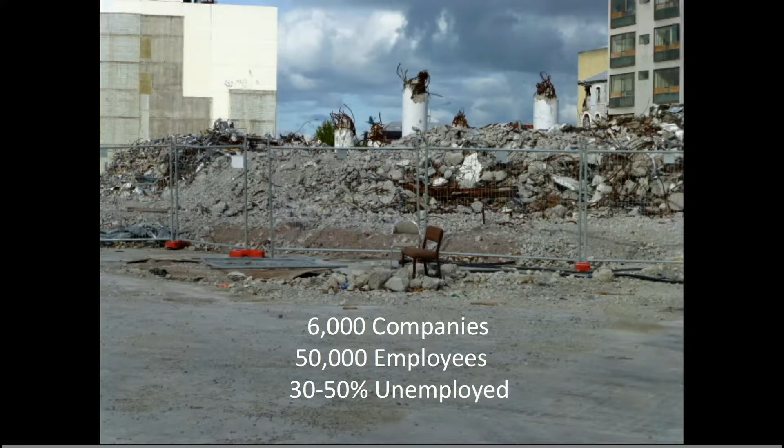About 1,800 buildings were demolished. There was essentially the loss of the entire downtown. In that downtown, there were about 6,000 companies with 50,000 jobs.

In the immediate aftermath, of course, there was a significant amount of unemployment. Now, some of that has come back by people moving to the suburbs.

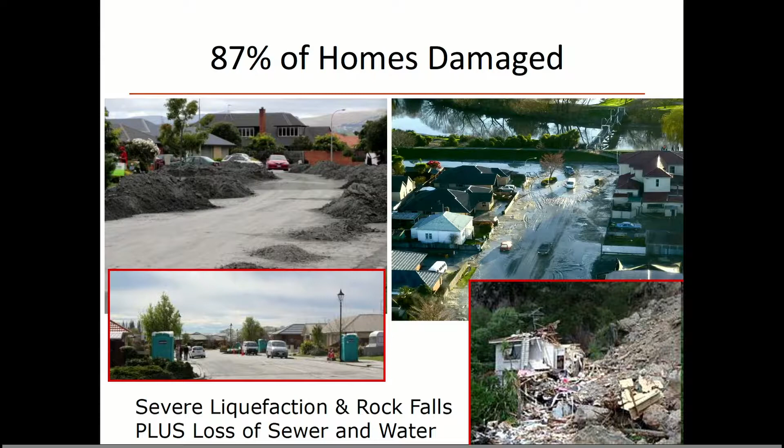But there was also a huge amount of damage in homes. 87% of the homes had some damage, about 30% of those quite significant. There was severe liquefaction throughout the residential areas, and there were rock falls and cliffs falling.

And yet the losses, by technical standards, we considered typical. It was about 50% of the value was residential, about 25% commercial, about 25% government and infrastructure.

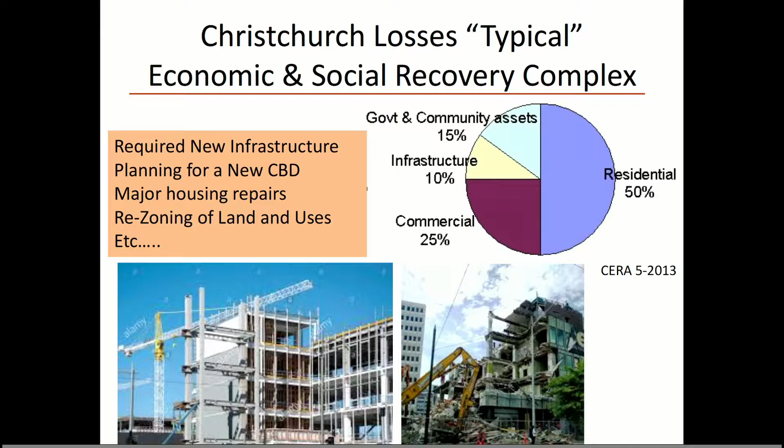But it required a huge amount of infrastructure replacement in the whole city. It required the planning of a new central business district, zoning of land use, etc. So it is a very difficult, time-consuming urban process.

Now, the social capital really made a difference. I talked about the social importance. The citizens of Christchurch were very loyal to their city. They organized in churches, art events, music events, they used vacant lots for concerts. All of these things really contributed to a sense of community and a willingness to recover.

But attitudes are really changing. Initially, there was a large plan to rebuild the downtown with a green and sustainable city. It was met with a lot of skepticism. But as businesses relocated out to the suburbs, there was traffic, but there were also floods, fires, more earthquakes, more disasters. And that began to influence people's attitudes.

There's some recent research by colleagues at the University of Canterbury in Christchurch that says the common views on building codes are really changing. People are not satisfied with just a life safety building code. They really want to see higher standards. And tenants renting in downtown buildings are expecting to have those standards.

They won't rent otherwise. So you see signs on real estate advertising the structural system of the building, advertising that this is a low damage building. There's a recognition that their experience has really increased the citizens' knowledge and made them better consumers, and has contributed a great deal to how the city is going to grow and change over time.

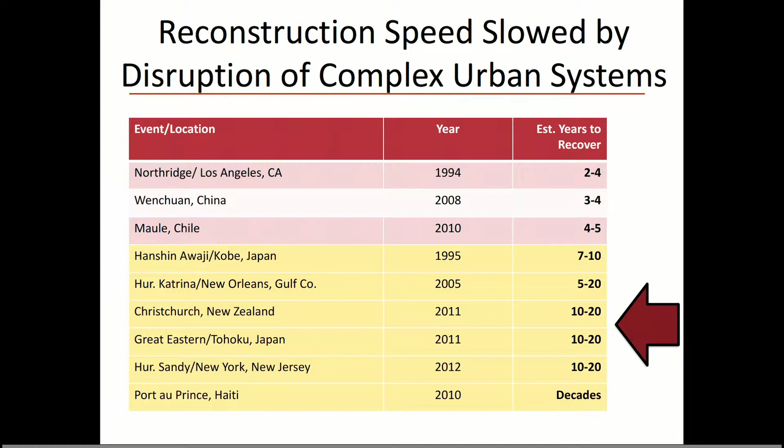This is because there are so many complex systems involved. So if you ask what was the experience in Christchurch different, yes, from those first three, but more like everyone else. So let's look at some of those cases and what lessons they can offer for resilience.

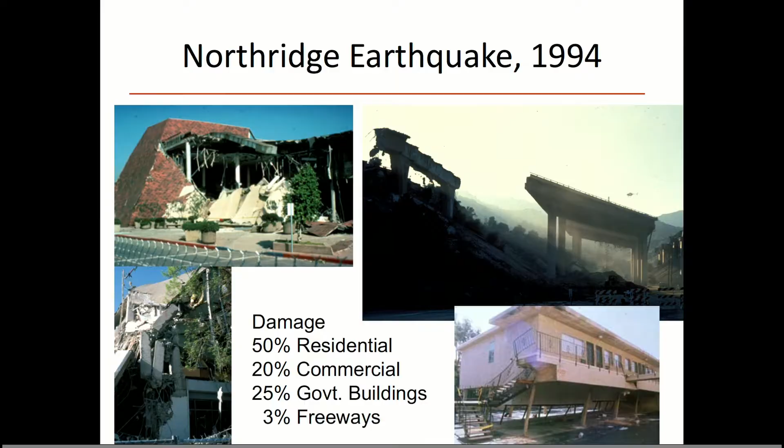First, I'll quickly discuss the first three because they're interesting cases. The Northridge earthquake in 1994 had a very similar profile, a much bigger city, but in terms of damage, 50% was residential, 20% commercial, the rest government buildings and infrastructure. There was a very good construction program for rebuilding the damage to public buildings, the city hall, the libraries, and there was a housing program.

There were about 15 neighborhoods designated ghost towns because the housing was so badly damaged. It took about 4 years to reconstruct that housing with a lot of intervention and government assistance at the city level. But it really wasn't until 20 years later, the last couple of years, that they began to do some resilience planning. So there was a gap between the earthquake, when they did construction and stopped, and now they're thinking much harder about the future.

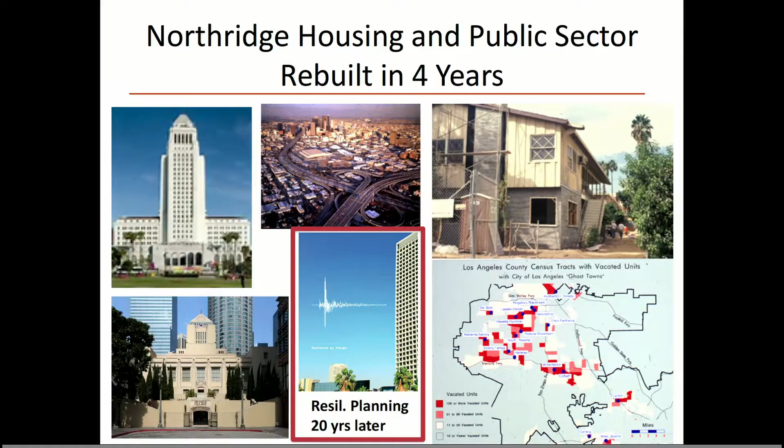In China, there was a very large earthquake in Wenchuan in 2008. Sadly, there was a huge number of deaths, more than 90,000, and 5 million people were homeless.

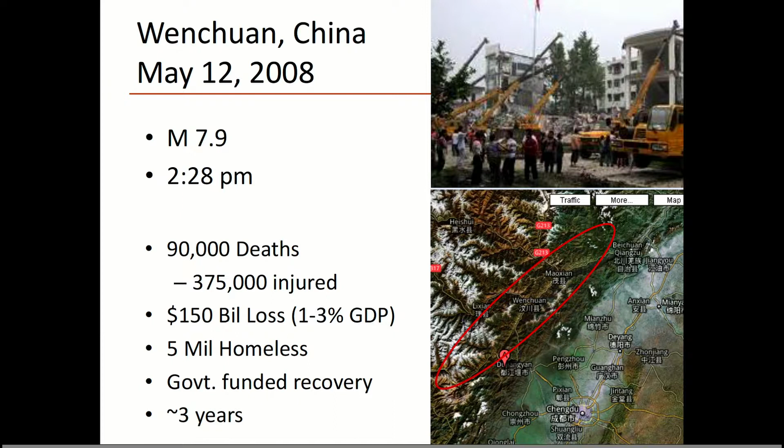The government did a Herculean effort at immediate assistance. They were very involved in directly financing the reconstruction, building schools and hospitals, and they did a very clever tax on the eastern provinces, 1% of their gross domestic product for 4 years to finance the construction.

An interesting lesson from there is that they twinned the cities from the east with the cities experiencing the damage. It meant that no one was overlooked, so everyone didn't go work in one place and ignore the other communities. There was a nice balance in the distribution of the aid.

But unfortunately, China likes to do things very fast, and very top down. So they really had some problems with construction standards and with the sites they chose to place the housing on. Understandably, they had a lot of people in temporary camps in the mountains, and they wanted to get people out of those dreadful conditions in the snow. But they built the housing so quickly with no consultation of the local communities.

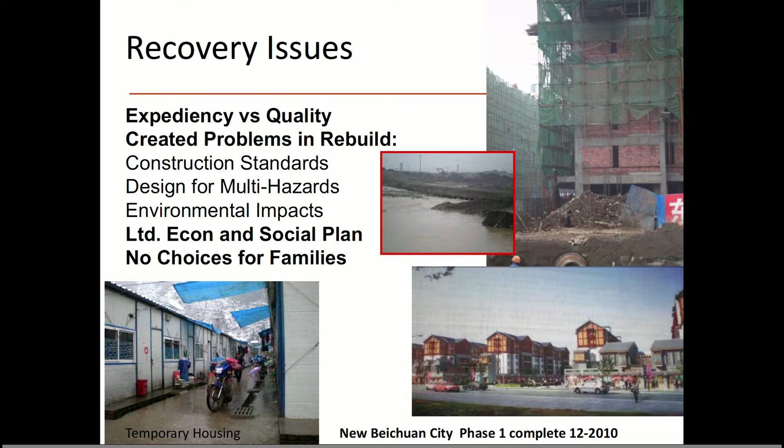The housing was so far away from where people's jobs were that often you only saw women and children in that housing, and everyone else was somewhere else to work because it just didn't work for them. So going too fast is not always the right solution.

In Chile, in February 2010, again a very large earthquake, again about 20% of the national gross domestic product. Chile, I think, is the most developed of the developing countries, as the minister tells me all the time.

They understood that they had a social commitment to housing, and they felt that the earthquake really set their housing program back many years. So they really focused on government funding of the reconstruction. All the infrastructure and public facilities are 100% funded by government.

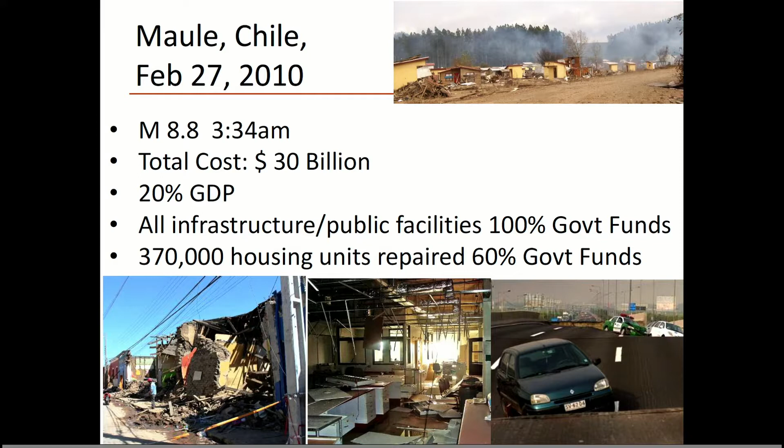Of the 370,000 housing units, 60%, mostly the affordable housing, was funded by the government, all through a 4-year tax on the mining industry—through unaffected industries, essentially.

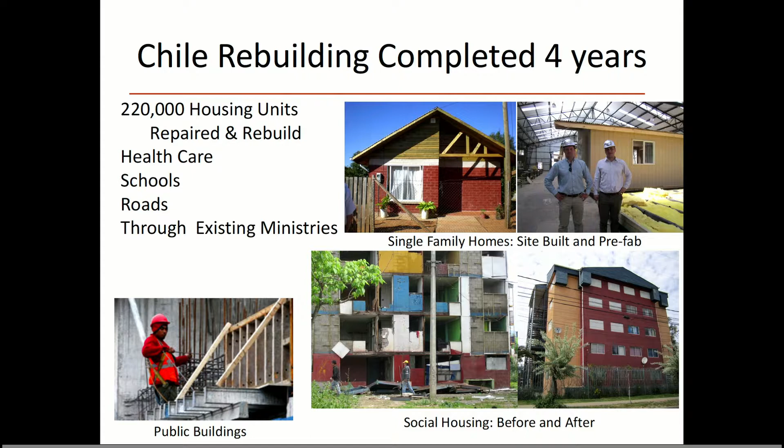It was an amazing effort, with standards set at the national level but local efforts, local contractors, and local regional administration of the programs to get all of this construction done in a 4-year period.

But I think in the process of getting everyone rehoused, they recognized that they didn't really focus very much on the economic and social side. Compliments to the Rockefeller program at Harvard University and the Recupera Chile post-rebuilding effort—the government and a lot of the design schools have gotten involved in this, trying to help with economic planning, social planning, and more citizen involvement in planning.

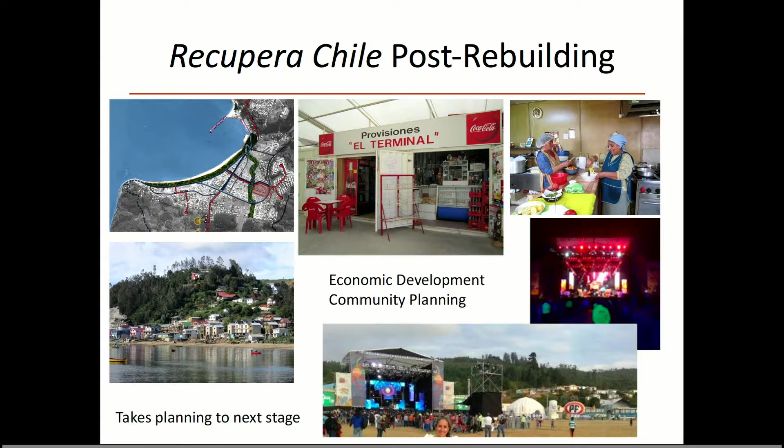I think these efforts are ongoing now in Chile, part of the larger disaster planning that takes place as they continue to have earthquakes, floods, and other kinds of disasters.

Now let's look at the other side. Those were the ones who constructed quickly, some more successful than others. But the majority have a somewhat different story.

In my own city, San Francisco, the Loma Prieta earthquake of 1989 was a relatively small earthquake in terms of dollar value. It heavily damaged infrastructure, freeways, and roads—not that much housing, not that many public-private buildings.

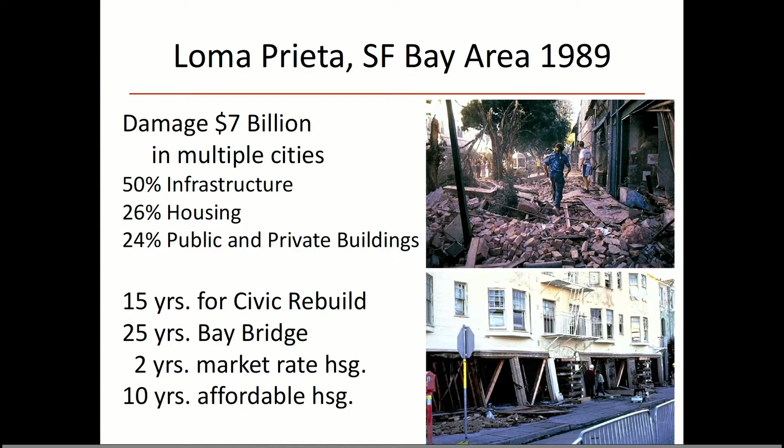But it was a very long-term reconstruction project, really about 15 to 25 years. It took about 10 years just to repair the affordable housing—the expensive market rate housing was built within about 2 years, but we lost a lot of housing for low-income people. That really took about 10 years, and we only ever rebuilt about 75%.

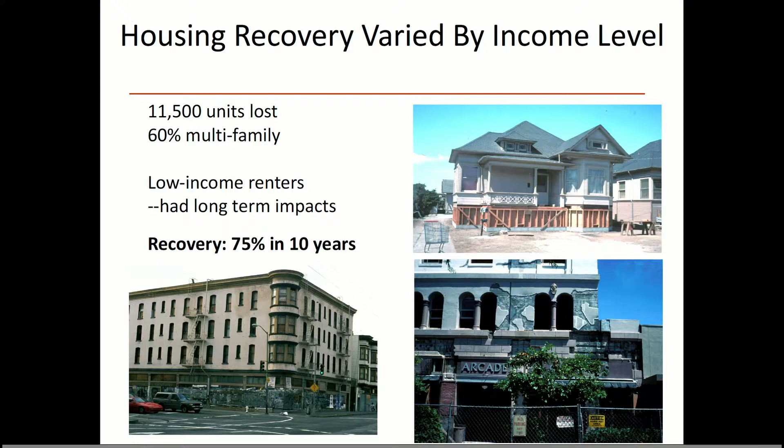It was a very hard process. There was very little funding. Wait, I skipped a slide.

For the infrastructure and civic projects, this is a case where taking the time to plan really makes a difference. One thing that happened in San Francisco was a huge planning process and discussion about removing those damaged double-decker freeways that ran along the waterfront, creating a much more beautiful, publicly oriented waterfront. That process took a lot of time.

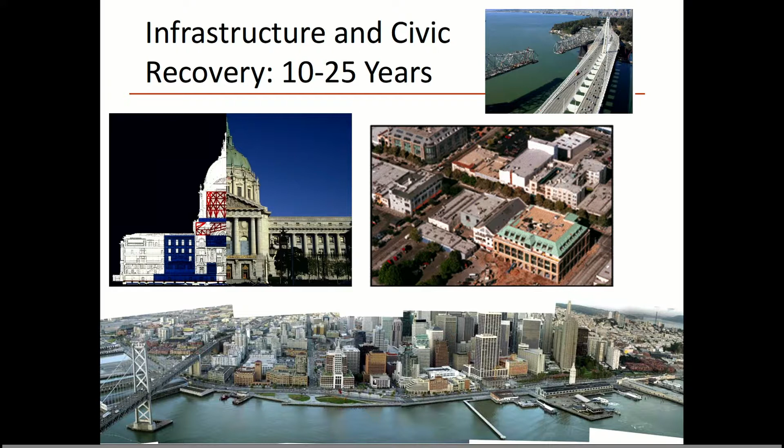They all have base isolated systems, so they will be functional after an earthquake. But the reimagining of the public space in the city took a great deal of time and a great deal of planning, but I think we have a much more beautiful and a much better city as a result of that.

There has been a number of city efforts in the last decade that have really focused on resilience planning, some of it creating models of what the losses would be in different earthquake scenarios, what kind of planning do we need to go forward. But there's an organization called SPUR that's been around for over 100 years. It's the grandparent of Mejor Ciudad, I think, and they will have to get to know them better.

Starting in 2007, they did an initiative on resilience, and all of this is available on the web, so people can look it up, just spur.org. It was a decision that for us, so bounded by water on three sides, such a high technology economy, many apartments, that shelter was really important, housing was really important. And we decided in this organization, which was made up, like Mejor Ciudad, of developers and business people and lawyers and government officials and citizens and academics, the goal was set.

That 95% of our housing should be strong enough so that people can stay in their homes in a magnitude 7.2 earthquake. Not in the most extreme, but in a design earthquake. And that led to some legislation about things that we needed to do to improve some existing buildings. But this process of the civic conversation was incredibly important for the city, and it really has changed the laws. And in fact, this is the model that Los Angeles has followed in creating their own resilience plan.

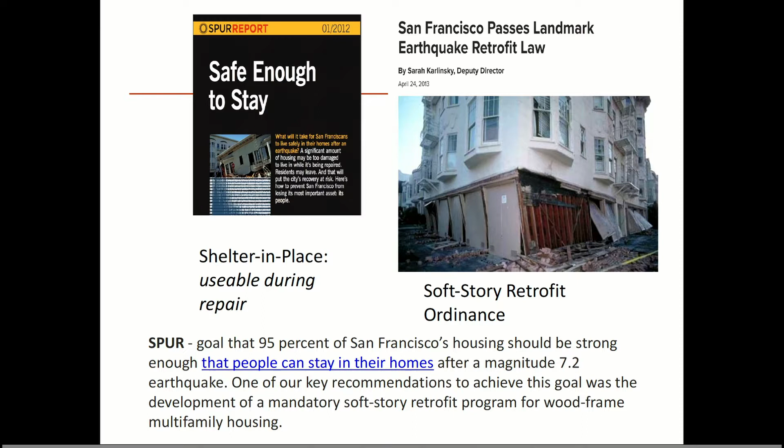An example that is less successful, I think, is the damage to New Orleans from Hurricane Katrina in 2005. Huge numbers of losses of housing units, over 100,000 units. 80% of the residents were evacuated at the time of the hurricane.

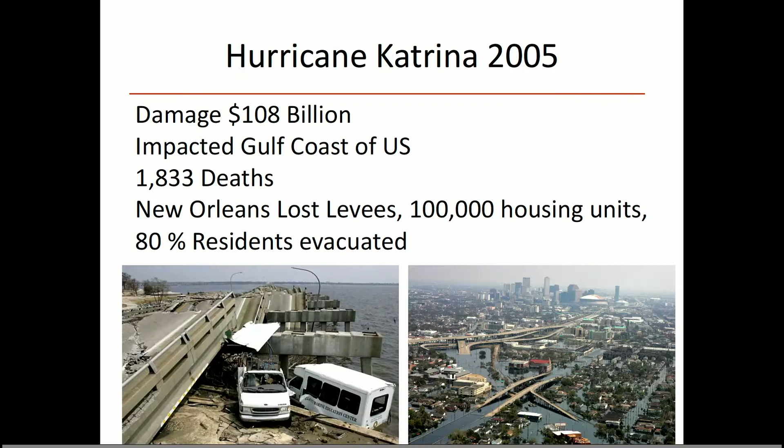Within 10 years, the levees were rebuilt. That was a federal program that were lost in the flood. The downtown was revitalized, and the tourists began to return. But we still have an enormous housing problem in New Orleans and in the Gulf Coast.

It took also, there was not enough civic involvement at the beginning. There were 2 failed plans that were government-imposed top-down plans, and it wasn't until 3 or 4 years later the Unified New Orleans Plan really involved the citizenry, and it was done locally by local people, that they began to really do more strong neighborhood planning and some social organization. It is really they have a long way to go for housing recovery. They are still having very serious housing problems now 12, 15 years later.

So recovery is something we see, and initially I showed that slide that was a single line of, this is what resilience means. But in fact, recovery happens over time in different ways. So businesses may recover at a different rate than housing, at a different rate than some social institutions or schools. So we have to really think about which of these things are critical to our city's ability to function, and which things do we really want to make stronger so that we survive better? Which things do we not want to have a long time to have a recovery process?

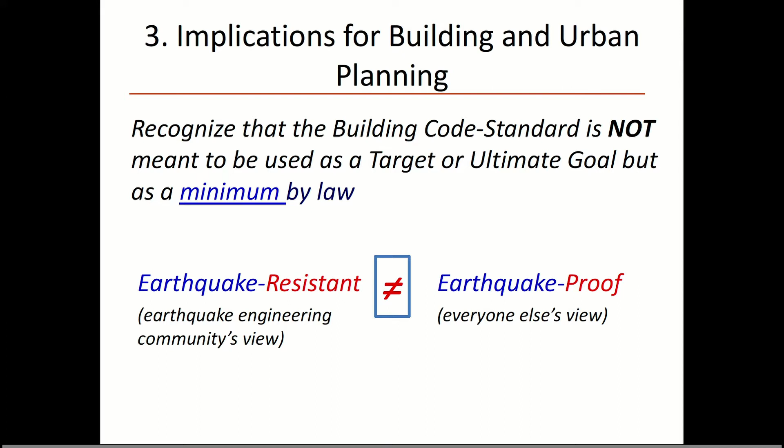So, oh my goodness, what happened? What's going on with this machine? It doesn't want me to talk about this. Oh my goodness. How do I get this to work? I'm really having trouble with this machine.

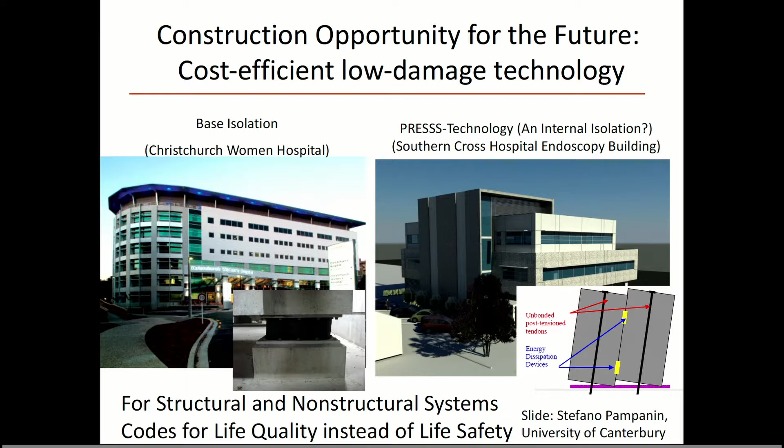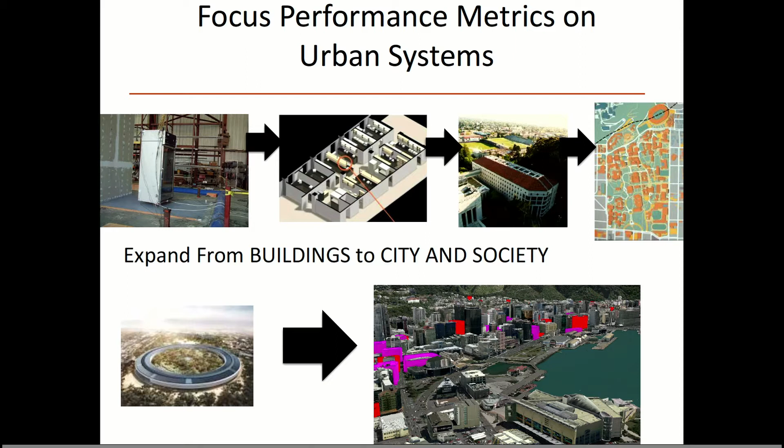So we really have, we need to think about low damage technology, low damage construction. Sorry, I got rattled by the machine. And we need to actually think beyond the building. Instead of just thinking about how do we design a building to perform well, make a hospital safe, make a school safe, make the Apple headquarters safe, it doesn't do any good if they can work in the Apple headquarters, but the people who work there have no housing, right? It doesn't help them. So we have to think about all of those systems and plan for those systems.

And we can measure these systems. We can say, well, as we did in San Francisco, how much of our housing do we really want to function after an earthquake, and what's it going to take to get to that goal in 20 or 30 years?

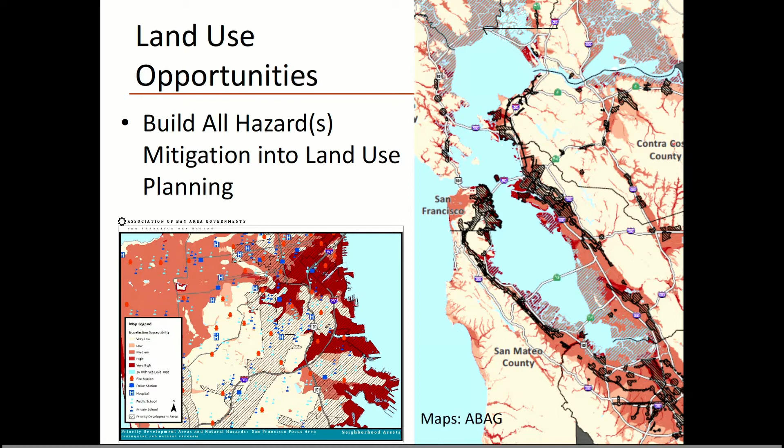We can look at land use planning and do a better job of using it, tying the hazards to the parcels so that we get a much better understanding of what is required, and whether or not it's really buildable.

We have to pay attention to ecological sustainability, we can't do without that. There's an example from Christchurch where they had so much geotechnical data after the earthquake that they created different zones requiring different foundation requirements. You could go online, type in the address, and see exactly what the soil conditions were at that site and what was required as part of the reconstruction.

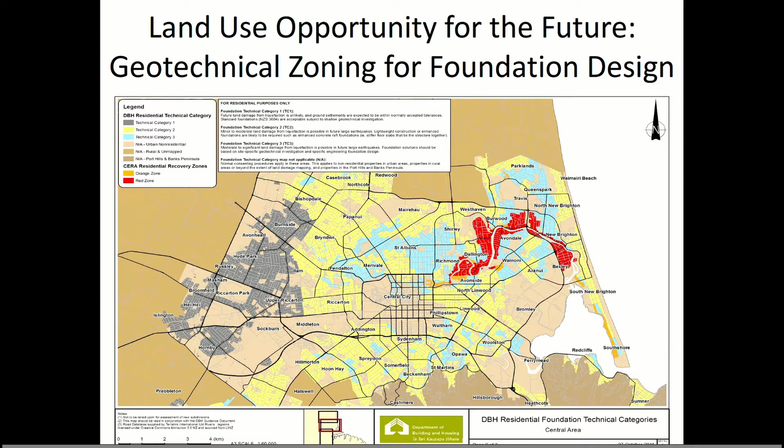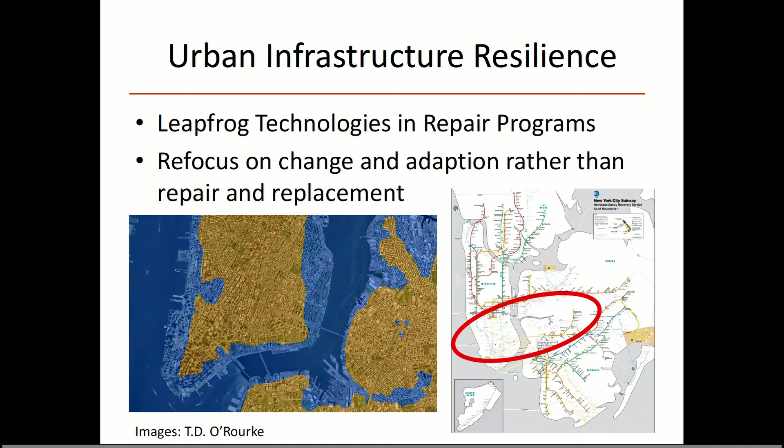The plan in Los Angeles: water comes and crosses the fault. All their water comes from somewhere else, so they have to make sure the pipes don't break when they cross a fault line. But they also want to improve the way the distribution system works over time as part of natural maintenance, and they want better sources.

Instead of all the water coming out of the mountains, let's have conservation, let's have water recycling, let's have some desalinization. If we improve all the ways we get water, we can grow as a city with or without an earthquake, but we will be more resilient, and that's important.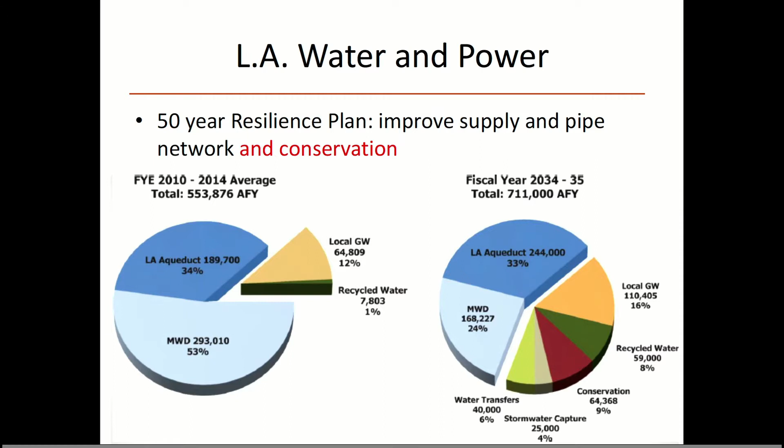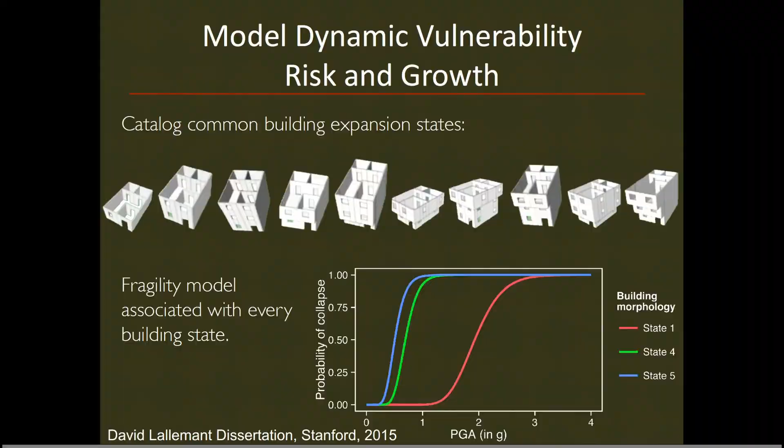This is an example from Nepal in which a student modeled how informal construction becomes more vulnerable as it gets bigger - the more stories you add, the more vulnerable it becomes. The importance here is that he combined urban growth models with hazard and vulnerability models, and the conclusion is that just helping to make self-built housing safer can reduce the risk by about 20% in 15 years.

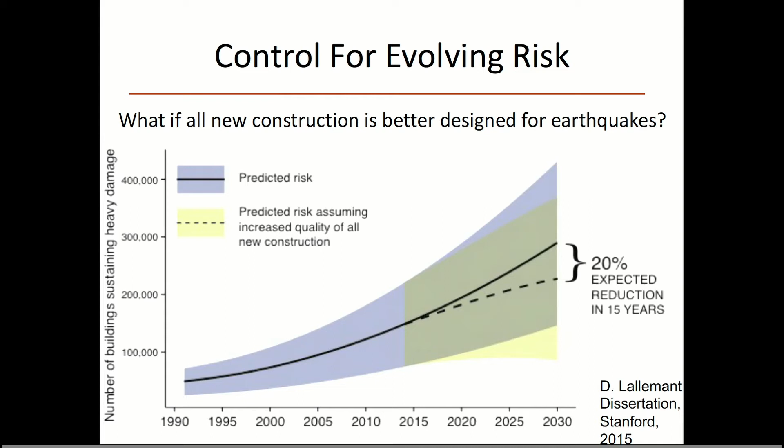This is an important lesson for every city dealing with informal housing construction. I think we need to think about how we train people, how they learn about construction, so that they can get lessons on how to build more safely.

Government leadership and communication with the communities is very important. Existing programs are easier to use - you don't have to create a new bureaucracy. But going fast shouldn't be the only criteria; it's important to manage information.

You have to communicate with citizens all the time. Recovery should enable citizens, not create entitlements. This isn't about an expectation of just a handout, but it is about, yes, you will be helped, and yes, we want you to do some of your own preparations. We want to make sure your children know how to act in a disaster, that they know what to do.

And finally, some lessons on resilience. Sometimes these big planning exercises seem overwhelming. I think it doesn't have to be complicated - you have to do what is good and simple and implementable. Don't try to do everything at once.

I think it is critically important to improve building standards and metrics for enforcement. You have to develop metrics for the urban systems - how many of my schools should be operational after an event? How many hospitals do we have to have functioning? How much of our housing so we don't collapse?